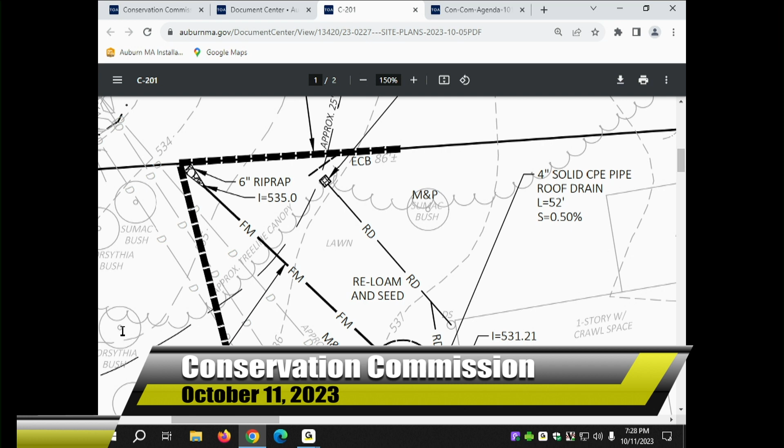The other situation was pretty interesting, a little bit more challenging. As engineers, we like to avoid mechanical systems, and I try to do that here. However, as part of my limited topographic survey, I had gone out to the lot and shot the elevation of the top of the foundation, the grades around the house, and the elevations of the existing conditions.

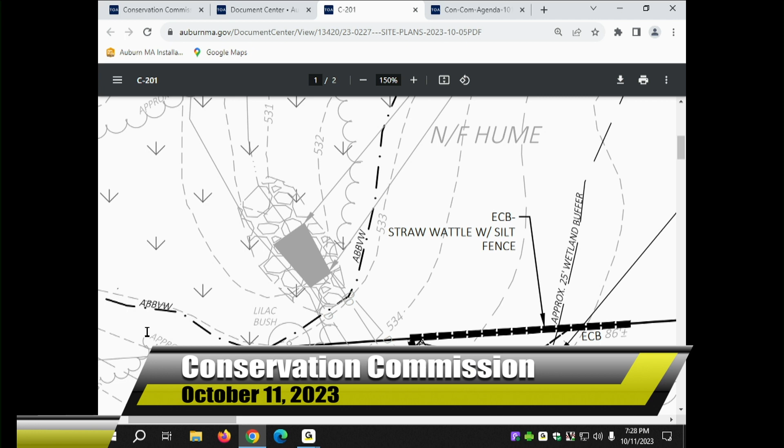If you could, Jesse, pan to the left over to the rear left part of her property. There you go, north. Okay, there you go. So there we have a flared end. It's a 36 inch HDPE, high density polyethylene, corrugated pipe, along with a 2-inch water pipe, also polyethylene.

That was installed years ago by the Auburn Highway Department, now the DPW. As part of that installation, Bill had installed the force main for the sump pump in the basement. Historically, like all the houses in that area, the hydrologic soil group here is group D, which as you know is a horribly draining soil. It used to be an old farm, and they rerouted a stream eons ago in that area.

So what they had done is, in some parts of the site, they left the original soil. In other areas, they put in some of the Hinckley soils off the hill to the west, which are well-draining soils, and pushed it down below. So if you dig a foot down or so, the soils are great. However, when you get deeper into the ground, you find those Woodbridge soils.

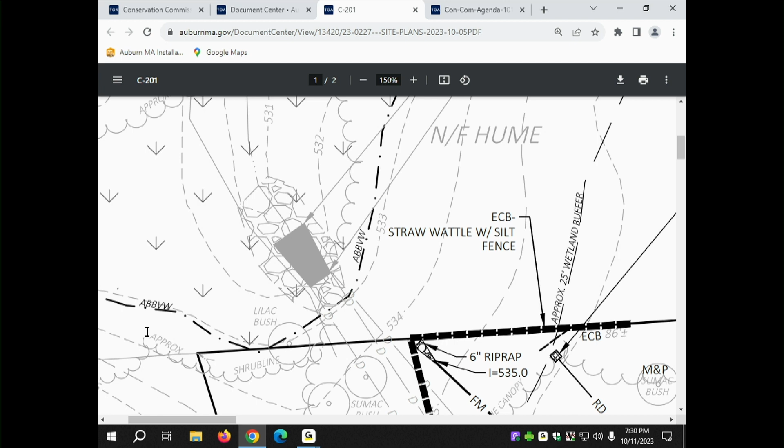So with that, I looked at it and said, okay, the infiltration, that's part of the problem why we're getting what we're getting in the basement. I took some photos, which I included as supplemental information to the Little Diggers filing, along with the plan. As you can see in those photos of the basement, there was standing water in there a week and a half ago. I can pull those up if everyone wants to take a look.

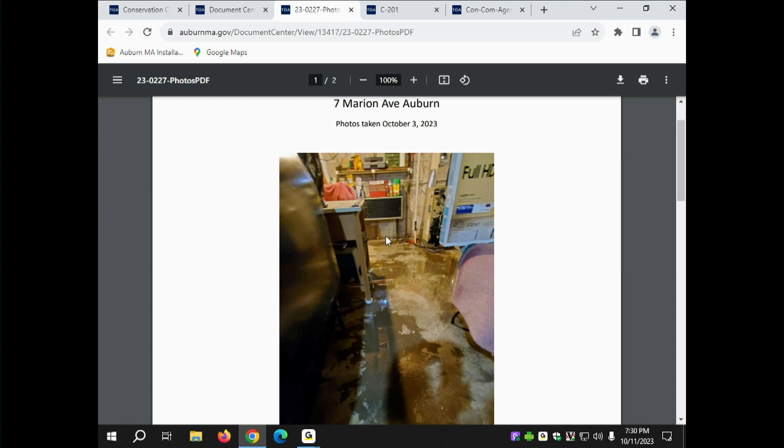Yeah, and this is something they've lived with for a while. Very frustrating. There's a new oil tank there, which will help address one of the comments raised by DEP, but there's standing water, it's horrible. The sump pump goes on, I'd say, every 10 to 15 minutes throughout the winter, and in the summer, all summer it's been going. So I think this is a project that needs to get done.

So what they hired Little Diggers to do, if we could go back to the plan, Jesse. Thank you. So right here, like I said, this is the existing information in terms of the inverts of the pipes. Knowing the area very well, what I've noticed is that in the less frequent storms, your 25, your 50, some people say your 100, we haven't, as far as I know in this town of Auburn, seen one of those yet. But looking at these storm events, what I've noticed is the pipe, typically that 36-inch pipe, is designed to flow half full.

I've seen it flow all of two-thirds full and then some. So with that said, looking at the invert elevation, Jesse, if you could pan up a little bit so I can see the invert elevation callout. So that invert is at about 530.6 on that flared end section.

The invert elevation on the force main is at 532.8. That just so happens to be about the same elevation as the basement floor, based on the top of foundation, measuring down the wall and determining the slab elevation. So I said, okay, we're at 532.8.

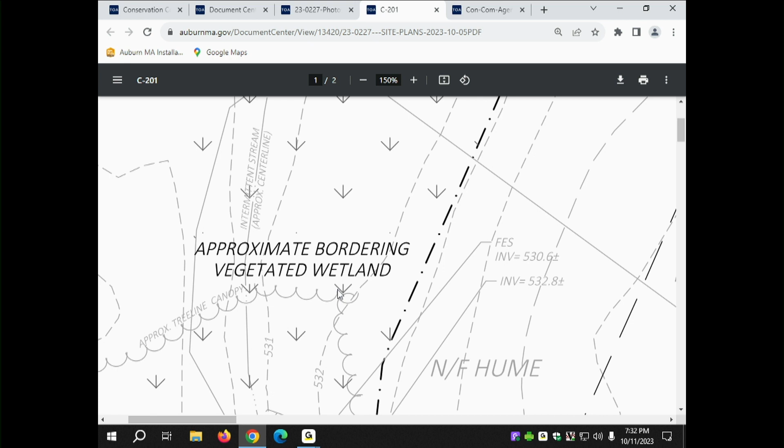I went to the bottom of the footing for the foundation drain. By the time I daylight the foundation drain out to that location, Jesse, if you could go out to, it would have come out somewhere around 531 and change, like 531.2, 531.4. So coming out at that elevation, it would have been submerged in the tailwater of any activity, any storm event going on, when we were experiencing tailwater in the flared end.

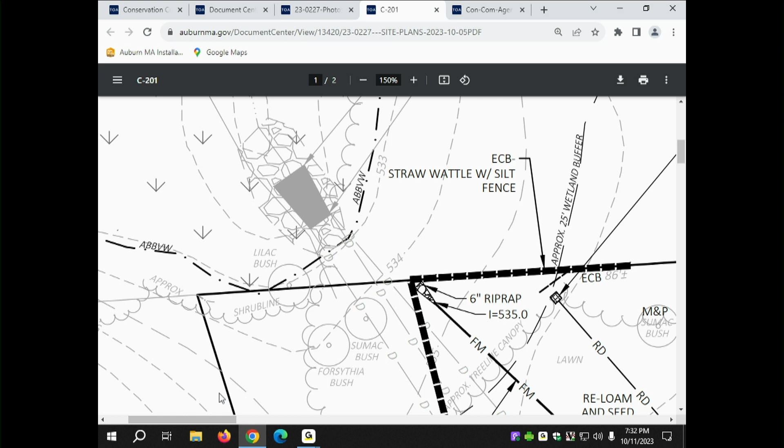That would only exponentially exacerbate the situation in the basement. So had we flowed gravity to that location, when that area surcharges, it's going to back water up through the pipe that would have been put in the ground and come up into the basement.

The plan originally submitted by Little Diggers was looking at a gravity system. Looking at it, I guess if you didn't know the history of how that pipe functions, or how hydraulics work when pipes are designed—they're designed to flow half full or 2/3 full—if you didn't know that, then you'd probably site it at that location.

Well, having known that, I said, well, obviously it's going to have to be a pump system, something I don't like doing, but in order to rid themselves of the situation, they have to do it. Jesse, if you could go back over to the foundation, please.

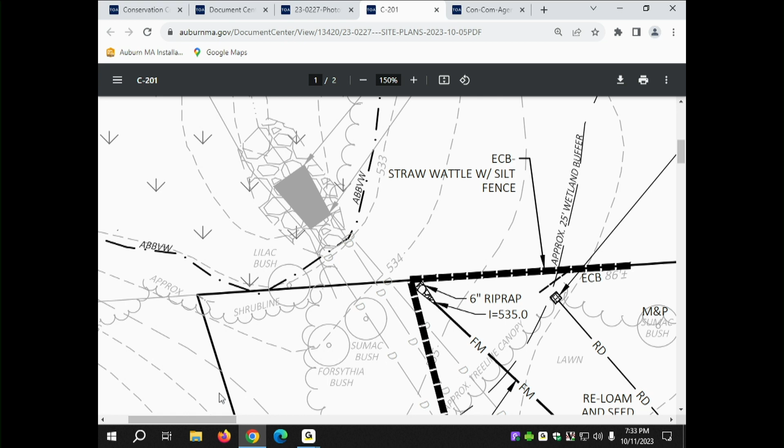So what they are proposing is along the front where you see the FD, the bold line—that's the foundation drain. So they're going to excavate the front of the house down to the bottom of footing. They're going to put in the foundation, wrap it in a filter sock or Mirafi fabric, and then put 3/4 inch to 1.5 inch wash stone with a Mirafi liner up the sidewall to prevent any silt from making it into the stone, and that will serve as their foundation drain. That'll come up to within about 6 inches of finished grade.

That will flow from that elevation at 0.5%. I could have put it in flat, but what I wanted to do is just get it the heck out of there. So I ran it at 0.5% from over by the garage at the 533.5 all the way over to that structure, the circular structure, which has got a drain manhole. It's going to be a cast iron drain manhole only because of the depth of the structure.

And so what it is, it's a pump chamber. So they would have a pump chamber, a pump located at the bottom of that pit. I have a 3-foot sump in there so that the water will flow through the foundation drain into the pump chamber, drop down into the 3-foot sump, from where, once it fills 3 feet, it's going to get ejected out to the riprap apron out back.

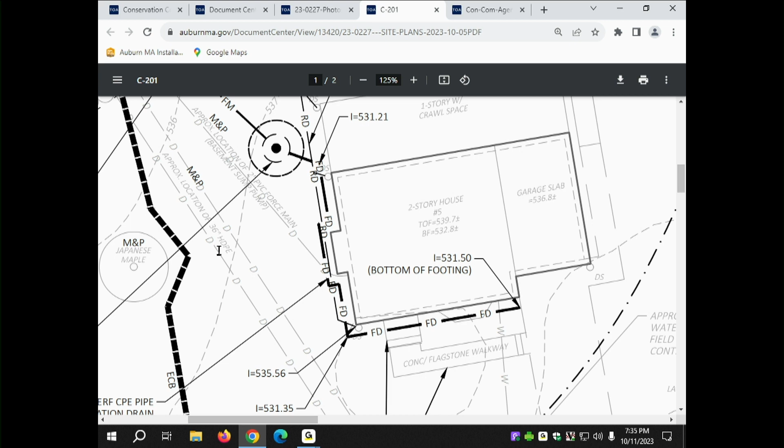So the way this is designed is—Jesse, if you could scoot out to the detail sheet. What are you looking for specifically? Yeah, if you want to zoom out totally in the detail sheet, I can tell you what we're going to do for erosion sediment control measures.

So if I could, again, I failed to get into the total scope of the project. So it's a few things. There is a water pipe. She's looking to have the water service to the house replaced. She's looking to have this foundation drain situation addressed, rooftop runoff redirected underground, and she's looking to have her front walk redone and the front steps. So it's a little bit more than a new water service to the house.

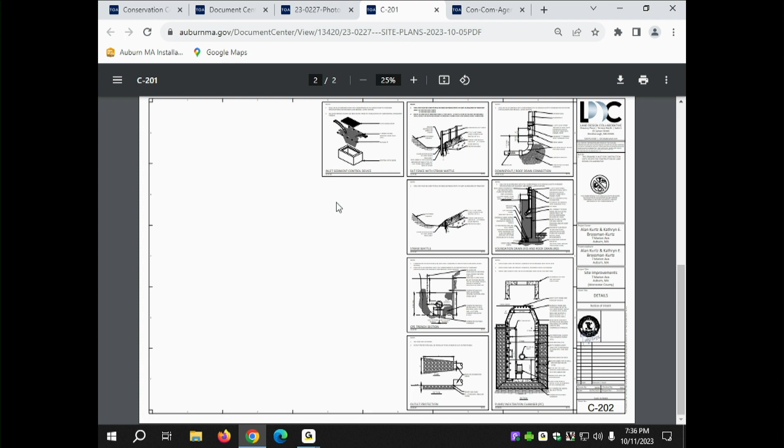So all of this work is being done upgrading the proper erosion sediment control measures. Now that we're into the full scope—I don't mean to keep doing this to you, Jess—if you wouldn't mind going back to the plan, so I can show you the erosion and sediment control.

So, to the front, Jesse, if you could. In the front, what we're proposing is because they're doing work—as you can see the contours from the house over near the step pitch out to the street into the driveway—because of that, we'd need to intercept any sediment or sediment-laden waters that would move across the lawn out onto the pavement.

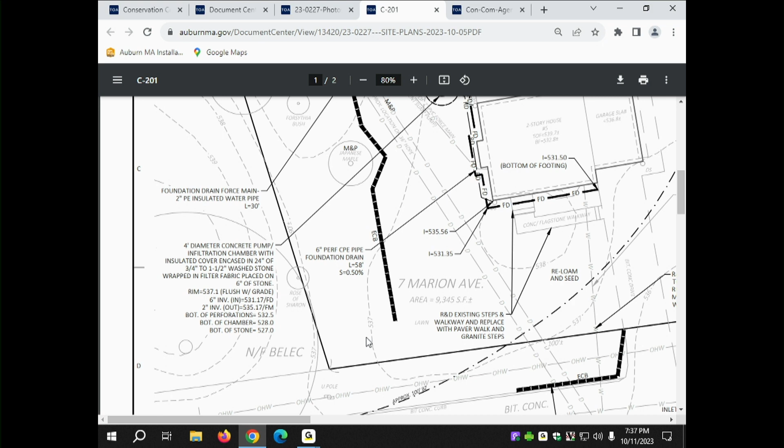So what I propose there is a straw wattle to be staked in that location. And then over to the east of that, Jesse, I have proposed in that catch basin an inlet sediment trap. I'm sure you folks have seen those before. So basically what will happen is anything that makes its way down the driveway that gets into that catch basin will be caught in the trap, and they would have to maintain that along with their other erosion sediment control measures as construction is occurring.

So typically on a project, we would propose an anti-tracking pad on a site. If this was a subdivision or a site plan, we'd certainly have all those bells and whistles in place. However, due to the scale of the project and knowing that it's a single-family house, the machinery going up the driveway is part of the order of conditions. If the commission would like to include sweeping of the site after each workday, I'd be happy with that, but I didn't see any reason to propose cutting out the driveway and putting an anti-tracking pad in.

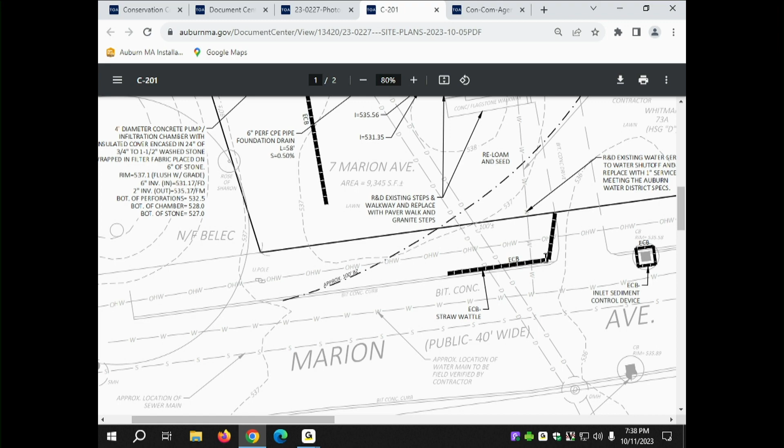So with that said, if we could work our way along these erosion sediment control measures here, Jesse. The erosion sediment control measures work their way along the westerly portion of the limit of work, then north around. She's got a Japanese maple there, so it'll work around the Japanese maple, which is to be maintained and protected. Her husband has a couple of sumac trees that he planted out there—she would love to see them nuked, but we're going to maintain and protect those.

So the erosion sediment control measures do continue out to the rear property line. All the work being proposed is upgradient of the erosion sediment control measures. I did see there was a comment by DEP that made reference that all work should be upgradient of them. I'm not sure if they saw the flared end section out in the wetland and interpreted that as part of the scope—it is not. So all the work is proposed upgradient of the erosion sediment control measures.

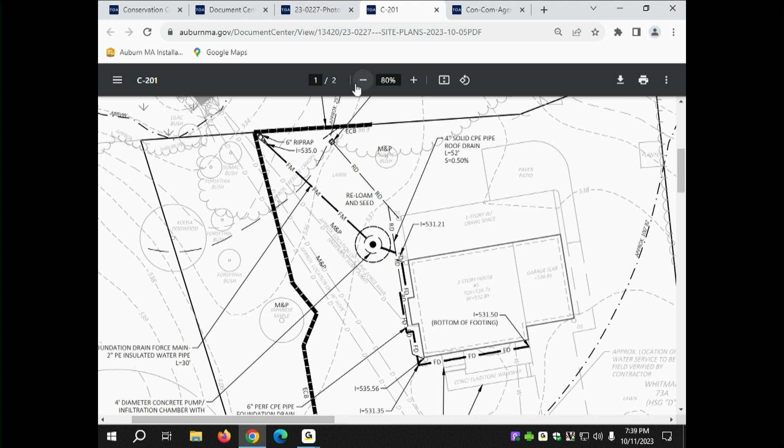So Jesse, if we could go back to that pit detail. A couple of things when I was looking at this: I looked at the approximate wetland elevation out there, and if I recall it seemed to hover around the 532 elevation. If you look at the limits of the resource area and the vegetation based on my measurements, it looks like it hovers around elevation 532. So I said, okay, if I propose a leach pit that goes all the way down to the bottom of the sump, what they're going to be doing is it'll be lower—it's actually at elevation 528. The wetlands at 532, I doubt there's going to be much migration through those types of soils laterally toward the wetlands' hydrology, but I didn't want to risk it.

So I said, okay, we're going to make that lower section of this structure solid—a solid concrete monolithic base—so that from elevation 528, which is where the pump sits, up to about 532 and a half, there are no perforations in the structure. Beginning at 532 and a half upward, there are perforations. What will happen is any groundwater at that general elevation is going to flow not only into the perforated foundation drain but within this leach chamber—so it's basically a leach chamber.

And then it will be pumped out to the discharge point, which would be 6-inch minus riprap on the edge of the lawn. I did look at the area, and I could have taken it further out where Bill Coyle had taken his discharges, but those weren't on her property—they were on Mark Hume's property. Being the engineers on the project, unless she has an easement from Mark, which I know she doesn't, we wouldn't be doing that. Understood. I have a question.

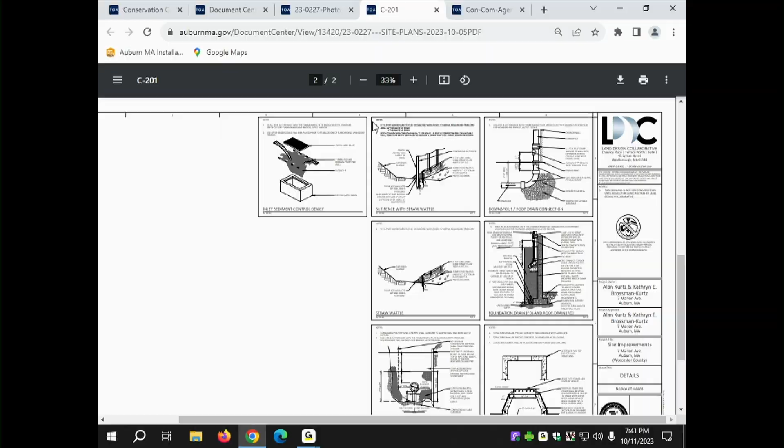What about maintenance of the sump pump? So that's on the homeowner. Clearly, but the question is, what's a reasonable maintenance schedule for that, and how does the homeowner do it?

Basically, they would remove the sump pump like any sump pump, like the one I have in my basement. I would hope that when it's installed, they'd put some breakaway fittings on there, so that if it has to be removed—that structure, Mr. Chairman, is an 8 to 9 foot deep structure. That's a real baby. Right, and so there's a polyethylene—I mean, is there a ladder going down into it? Yep, right along the sidewall of the structure, typical manhole, so it would go right down the sidewall of the structure.

They get down into the structure, remove the pump, and replace it. Has Little Diggers been provided with a copy of this? They have. And are you confident that they will follow the plan as you proposed it?

I love the question, Mr. Chairman. I'm not asking you to guarantee their work. As you know, when they came before us the first time, they gave us this plan, which did not instill confidence in any of us. I think your plan is what should have been submitted originally. I just want to make sure that they comply with the plan you've provided.

Again, Mr. Chairman, I appreciate that question. As I said when I introduced Kathryn, she's also a friend, so I want to make sure she gets a fair deal here. That's why I got involved, just to make sure it was going to get done right.

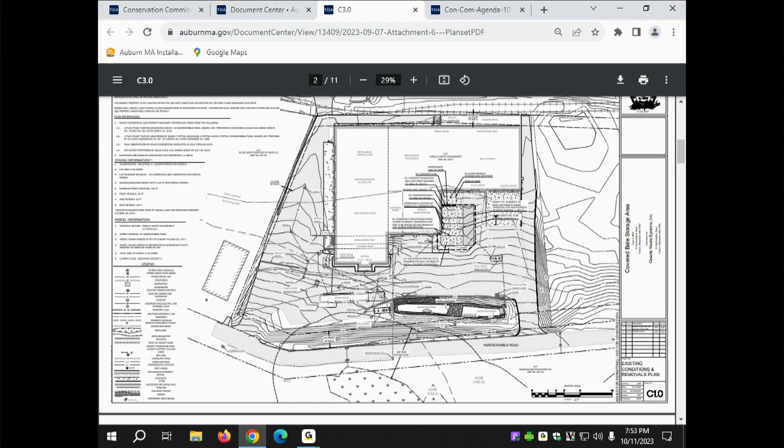And adjacent to it is paved area throughout, including a loading dock here, but the majority of bales are shipped off site. I'll move on unless anybody has any questions specifically about the facility in general. No, go ahead.

This shows a similar figure, essentially the removals and the erosion controls on C 1.0. A little difficult to see, but the red identifies erosion control - those are silt socks that we've positioned at the down gradient side of the work area. So that heavy dash line essentially is the perimeter of the work area.

There's a pretty steady slope. You don't have the contours here, but the slope goes toward the detention pond. In fact, all drainage from this area splits in the middle. A portion goes to a catch basin on this side, and a portion drains toward a catch basin closer to the truck scale. That drainage all goes through their existing system.

There's a sediment device here called a Clara unit, sort of an oil water separator and separation unit. It drains through that catch basin and works its way to a 12,000 gallon underground oil water separator before it goes into the catch basin and discharges off site, eventually across Hardscrabble Road.

So that's in general the footprint of work and the extent of it. There's also potential excavation for the footings and walls for the system, segregated into 3 separate sections of concrete slab, as mentioned, stepped down. So there will be some excavation and likely some excess soils that need to be managed off-site, as well as the demoed slab area that's going to be replaced in kind.

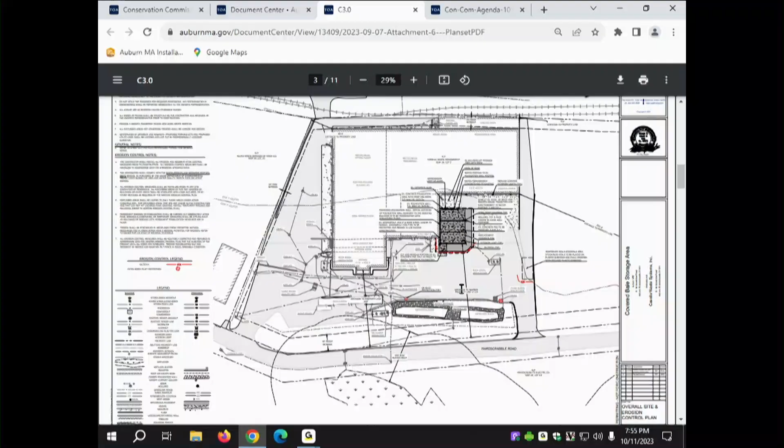How many square yards of concrete are we talking about? I don't know the square yards. It's an 8-inch slab. It's just under 3,000 square feet, I believe, in total. Okay.

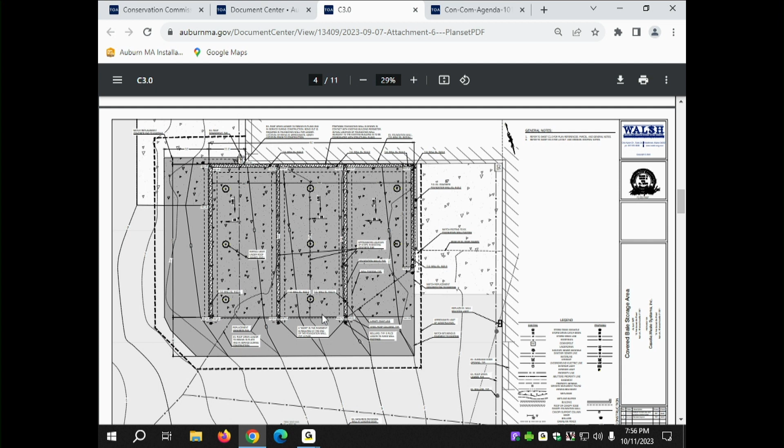So excavate, and will the slab be poured in one pour or a few pours? I believe the slab would be placed in one event. It's not a large area, and the foundation walls extend above grade to provide a barrier between the bays, and there'll be protective steel on the sides just to prevent movement and protect the structural steel itself.

So what's the estimated duration of the project? I'd say 4 to 6 weeks. Okay, that's what we anticipate.

Some of us more than others are very familiar with the site because we've done a number of site walks there. I think it's very straightforward. I don't have any questions. Megan, any questions? Nope. Chris?

Sounds good to me. Just for background, if I can interject, I think there are benefits to stormwater here, right? The struggle of having to place bales outside and cover them can be dangerous, and it's just not very effective, to be honest with you. And then the safety part of it, the fire department's concern about these bales, if they do happen to catch on fire, the danger they present. So it'll be obvious.

Michelle, do you have any questions? I think we lost her. Nope, I'm good. All right, thank you. Nope, good, appreciate it.

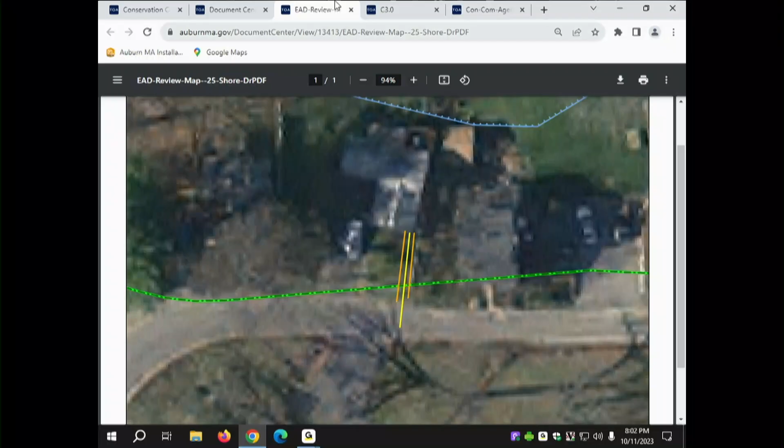Sounded like Darth Vader. Michelle, we didn't hear you. I think that was an aye. I heard aye. Yeah, okay, all right, we can count. It's a vote.

I'm in my car, literally, trying my best right now. I know, and we appreciate that. We really do. Doing great. So we'll try to zip through the others, okay? We don't want you to get into an accident or anything.

We had received a request for a certificate of compliance for 65 Chestnut Avenue. We did take a view a few weeks ago. Is there a motion for 65 Chestnut Ave?

Motion for certificate of compliance, to issue the certificate of compliance for 65 Chestnut Avenue. Is there a second? I second. Any discussion? All those in favor say aye. Aye. Aye. It's a vote.

For 54 Prospect Street, we have also taken a view. Mr. Grabowski was kind enough to meet us there. I've got the pictures that Glenn brought online too. When we were there, we had noted some concerns about the channel, which apparently you've addressed. Yes sir, we brought a laborer in, if I can speak.

Of course, please. We brought in the laborer, and I was the second laborer. We did stone line it, to address the size of the stone. Then we brought in some half-inch stone to put in between. Took out nearly 3 buckets of sand over there where the wattle is. We explained in an email that if the commission chooses to give us the certificate, we guarantee that within 2 weeks the erosion controls would be out, as the buyer wants them out and the seller is obligated to take them out.